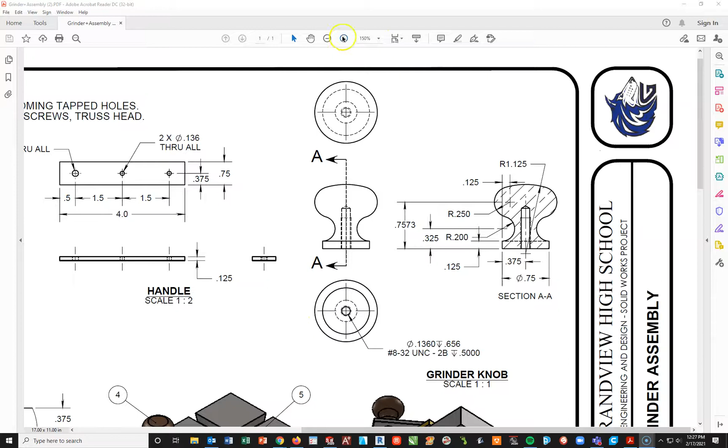Okay, so this will be the fourth video of the grinder assembly. The previous three videos on the YouTube channel cover the grinder base, the grinder slider, and the grinder handle. If you've not completed any of those three parts, please exit this video and go back to get those parts completed so you can finish the assembly.

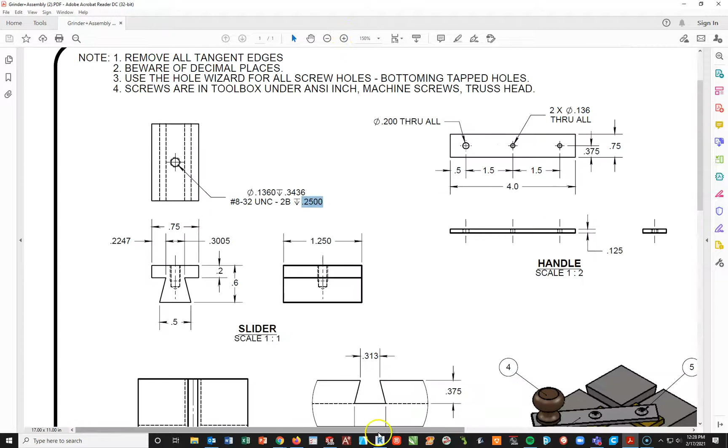This one I'm going to focus on the grinder knob. Now this one's a little unique because it's going to require a revolve feature. We haven't really done a revolve in class, but this is pretty straightforward. The key is going in and basically taking this half of the model, a section view, taking this left half or right half, doesn't matter, building it as you see it, and then doing what's called a revolve feature.

In this case, I'm going to start a new part in inches on the front plane. What I'm going to create is this left half with all the numbers on it of this design. Now to understand this, what I have here is a line at the bottom and a line on the side. There's a curve here with a second curve here and a third at the top, so there's actually three curves in total.

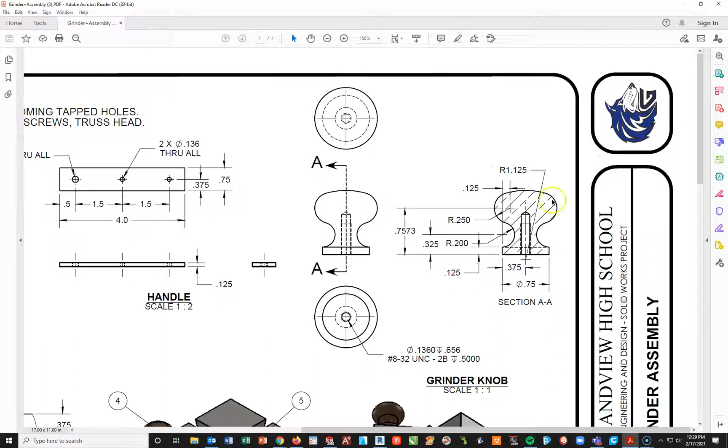I'm going to use my line tool to create curves. Actually, what I'll probably end up doing in a lot of cases here is using my 3-point arc tool, just to get the curves to look right. But we'll walk through this process as we go along.

I'm going to slide this drawing over so I can get my SolidWorks up on the other side and start with a file new, starting a new part in inches.

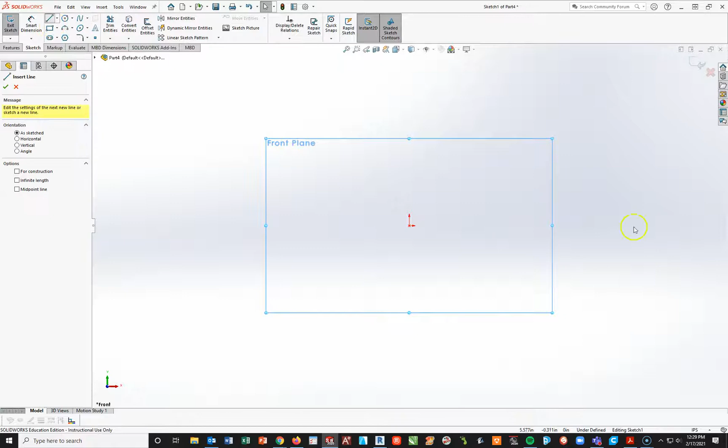Now for this one, I'm going to go ahead on the front plane. I'm going to start with a new sketch, and basically create half of the part I was just talking about. I'll draw straight up, pull away and touch the end line, allowing a shallow curve. I'm going to keep my curve right about there - that looks pretty good. Left click, pull away, come back and touch the end point.

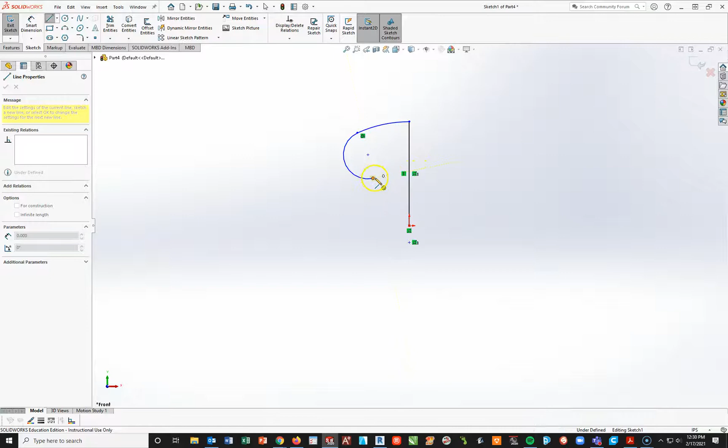I'm going to create a sharper curve, just kind of pull it there. Left click, pull away and touch again to create a curve coming the other way. Pull straight down and close. I'm going to hit my F key to center this up, rolling back just a little bit.

Now what I've got to do is define this piece right here. So I'm going to go through, and first I want to make sure that, for instance, this point here - this arc up here has a center point, that's what this little plus sign is at the very bottom. I want to make sure that center point is vertical to the end of this line, so I'm going to add a vertical relationship.

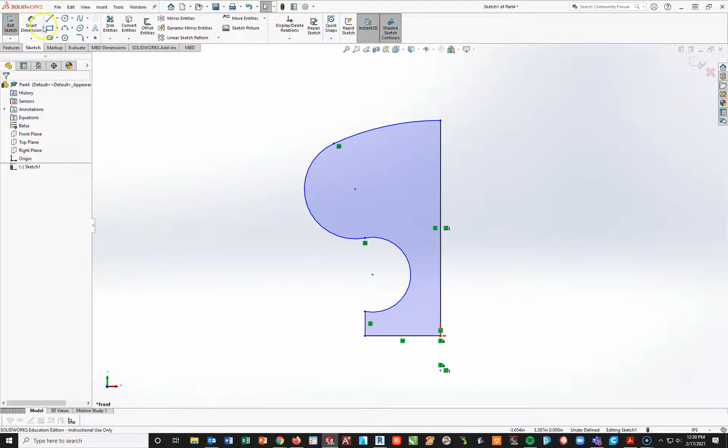And then I'm going to add a dimension there, and that dimension is going to be 1.125. Okay, so that gives me that dimension there.

Now this one here, I'm going to end up doing a dimension. Let me see, from here I'm going to do a dimension on this one of 0.25.

Also on this one I want to make sure the center mark here to here - now this is the hard part because this has to actually be inside, so I'm actually going to have to stop for a second, grab this and pull it in tighter. It's okay, it's going to shift some things. We'll get it dialed in here in just a second once we get this part figured out.

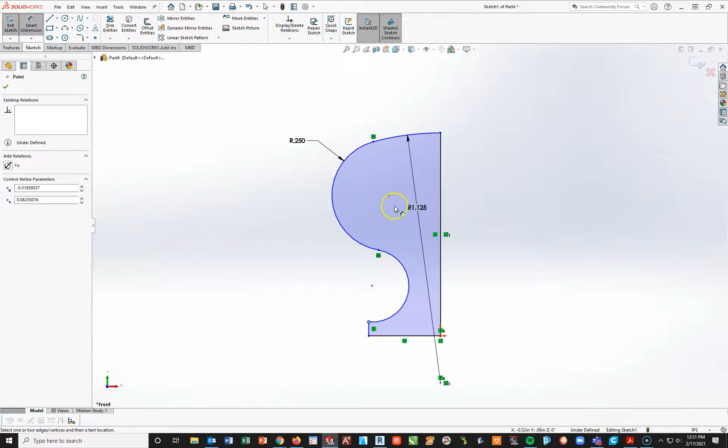I'm just going to make some adjustments here. Triggering my smart dimension, I'm going to dimension from this point right here to this point right here and pull straight up, making that distance 0.125.

Okay, and then I'm going to go from this point here to the bottom, which will be 0.7573. Now, so you can see this - as you can only see the 757, I'm actually going to left click on this, and instead of 0.123 document, I'm going to do 0.1234.

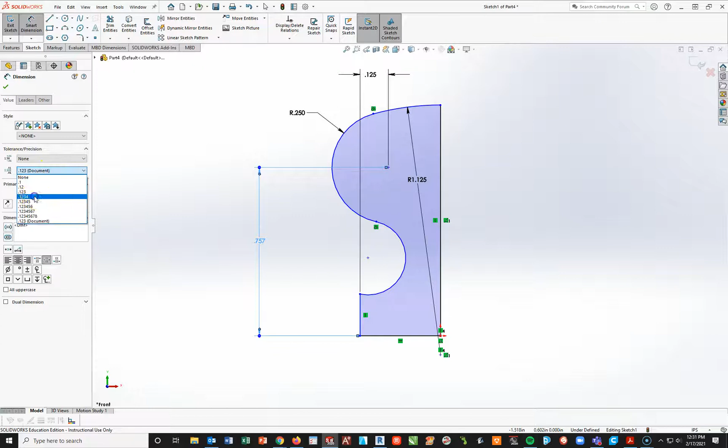All right, now I'm going to continue off on here. I'm going to go ahead and dimension this - this will have a dimension of 0.2. Okay, the height of this center to the bottom here is going to be 0.325.

And then I'm going to make sure that this point right here is vertical to this corner, so I'm going to add a relationship of vertical. Now it's giving me an error right here, and the reason being I think that vertical does not need to be there because it's already on that line. So I'll just highlight and delete that off of there, and call it good.

Go ahead and add in this height right here of 0.125, which has already been defined. That's good. And then this dimension right here will be 0.375. Okay, so now everything is fully defined. I have everything in black. That is exactly what I want.

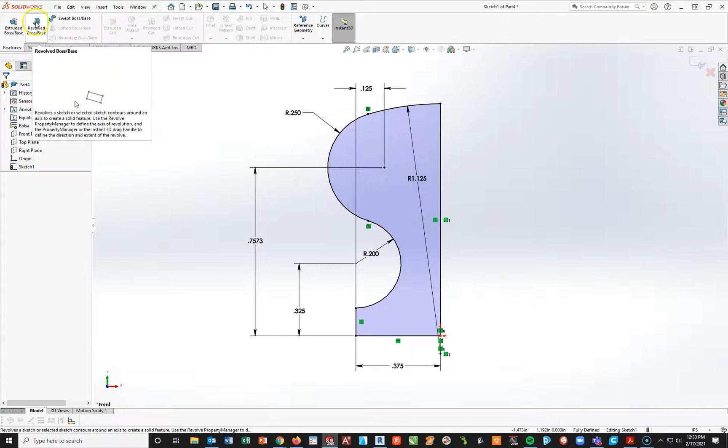So now the last step of this is to spin it or do a revolve. Okay, so I want to do the revolve. So under my features toolbar, there is a revolve boss base. Okay, if I click on this, what it wants to know is what is the axis of revolution. It means where do I want to spin this around. So in this case, all I want to do is I want to click on this vertical line, and the part will spin around the line. Okay. Now, as soon as you see that, go ahead and hit your check mark.

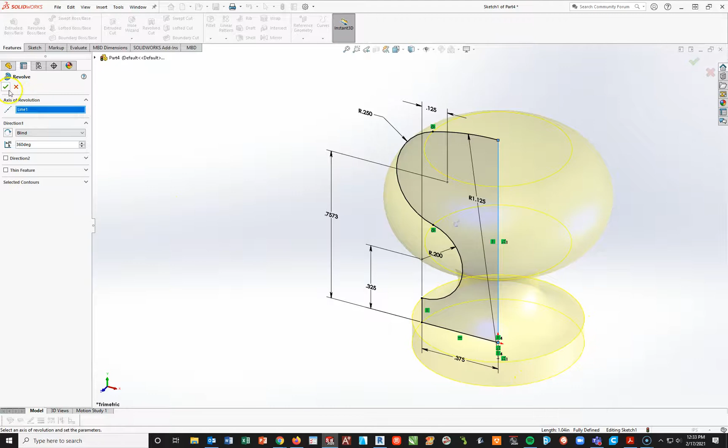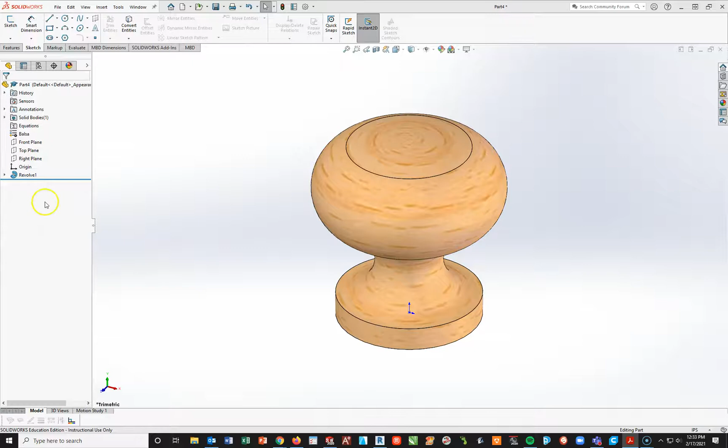All right. Now, again, we're not making this out of wood. So let's go down and look at our materials in our bill of materials. Okay. And let's say the grinder knob is made of a manganese bronze, which is under our copper alloys. So under balsa, right click and edit. I'm going to go to my copper alloys. In alphabetical order, I'll go down towards the bottom. I find manganese bronze. I'm going to do an apply and close. Okay. I'm also going to turn off anything that shows the shine. I think that looks okay.

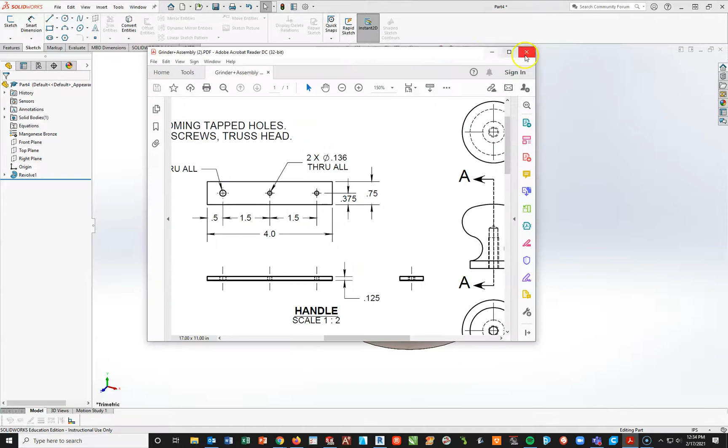Now, last but not least on this one, this goes right back into the slider. So let me bring this back over so we can understand this. All right, so what this is showing here in this note is that it is telling us we're going to use a hole wizard. Okay. Now, if you don't recall the hole wizard, go back, please, and watch the grinder slider that I created, because I talk about the hole wizard in depth there.

Okay. What this is telling me is I have to use a hole wizard to create this hole at the bottom of this part. Now, this is going to be a tapped hole. That'll be an 8-32 with a 0.1360 diameter hole, cut down at 0.656, and then threaded down to 0.5. Now, I don't expect you to remember that, but in class, I will show you what this is using the drill bits and my tap and die set. Okay, it'll make more sense when you see this physically in front of you.

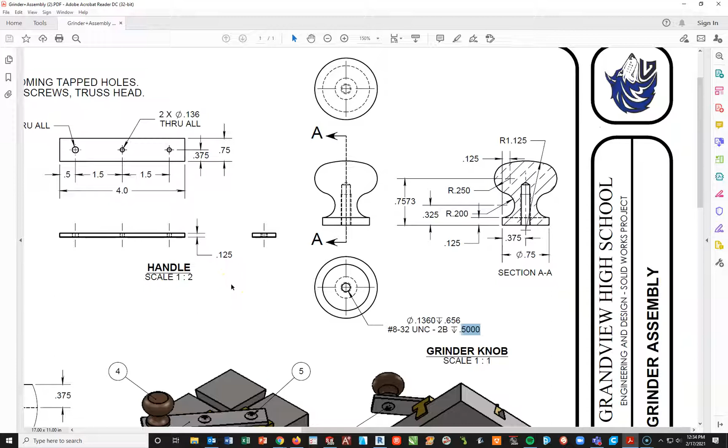But what I want to do right now is I'm going to go under my features toolbar here, and under features, I'm going to go to the hole wizard in the middle, and we are going to go ahead and redo this. Okay, so the hole I want to use is what's called a straight tapped hole. A tapped hole is threaded. I will turn that on. I want to make sure my units are matching to the part I'm creating. So I should see ANSI inch here. Now, if you see something else, use the roller ball in the middle of your mouse and get it up to where you see ANSI inch.

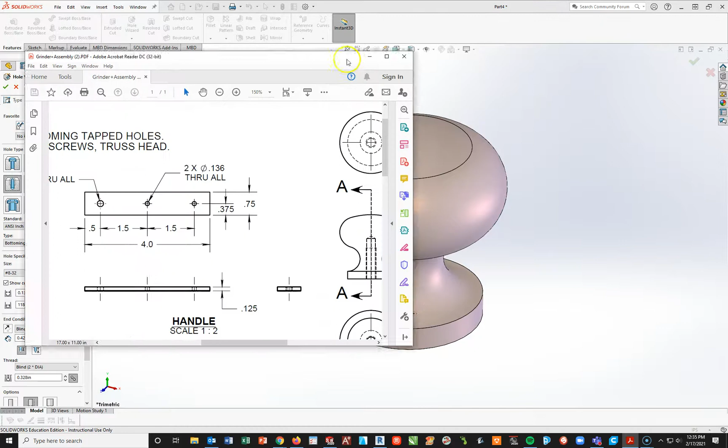Bottoming tapped is fine. The size of the hole, since I've done this before, is using the last hole I used, which was an 8-32, and that's exactly what I want. I'm going to go to Show Custom Sizing. Okay, now here's all those numbers I was talking about. I'm going to slide this over real quick so you can see. I'm going to go over here and explain this on this hole. Okay, the 0.1360 is right here. 118 degrees, don't worry about that. But then we have to have a blind end condition. It doesn't say through all, so it has to be blind.

What I'm going to do now is enter the next two numbers in here. Okay, let me pull that back up, sorry. I'm going to enter 0.656 in this box. So I'll go 0.656, enter. And then in the third box, let me pull that back up real quick, I'm going to add in the 0.5. Okay, so the very last box down here will be 0.5, enter.

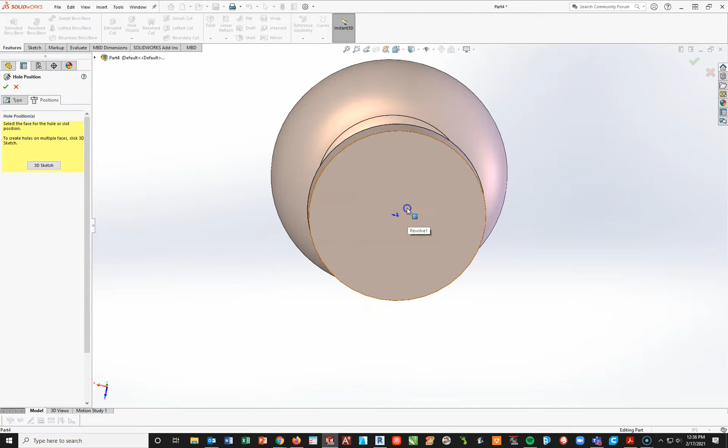All right, now that I have this done, I need to position this hole. Okay, so I'm going to turn on my positions tool. It says select the face for the hole. Well, I'm going to have to rotate by pushing my middle mouse button down and rotating my mouse around. And I'm going to highlight this bottom face right here. And then I'm going to attach this hole to that origin right there in the middle. I'm going to left click. I'm going to hit escape. Now on this one, I don't need the dimension because it's exactly where I want it, right in the middle. So I'm going to hit my green check mark. And now I have the hole I need in the middle of my part.

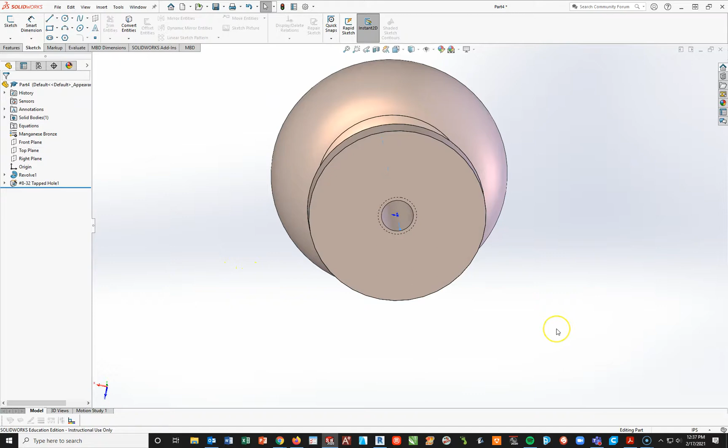Go to my isometric view, and now this part is complete. It was done in 2 steps. So I'm going to do a Control S. I'm going to save this in the same folder as all my other parts for the grinder assembly. I'm going to call this grinder assembly knob underscore my last name and hit save. Okay, at this point, all the parts are done. This is the 4th of the 5 videos. The next video I produce will be the video showing the assembly being finished along with the drawing.